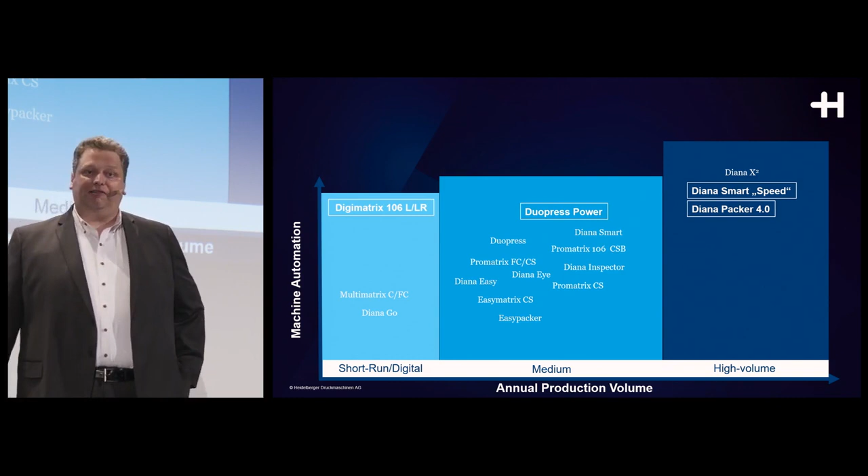We are improving overall productivity on the Diana Smart series with a Diana Smart Speed option that allows us to run up to 600 meters a minute, in combination with a packer and robotic loading. Obviously the robotic loading can be used on any kind of Diana system, so you can also use it on a Diana X. You might have noticed that I jumped one process step, and that is die cutting.

On die cutting, we also have product introductions to announce. We are bringing to market the Power Matrix 106 CSB, as well as the Pro Matrix 145, our first Format 6 die cutter, a 57-inch blanker. Above all this, though, is our layer of data ready, or Postpress data ready. That is a common interface that my colleague Stefan already described to you, and it hasn't changed. It's still a common interface that we defined that is open to any other MIS system for analysis.

Let's get started and take a look at new product introductions here. We're starting off with the Digimatrix LR, our digital die cutter. We are using multiple laser heads to cut a sheet according to the digital information we are receiving, so there are no tooling costs for the die on this machine.

We are integrated in our Prinect workflow so that we can easily convert data and adjust our cutting process. The cutting time itself and the machine speed will greatly depend on how much cutting there is to do. If you have a lot of cut lines, it slows the machine down. If it's very simple, straightforward cut lines, the machine will produce faster.

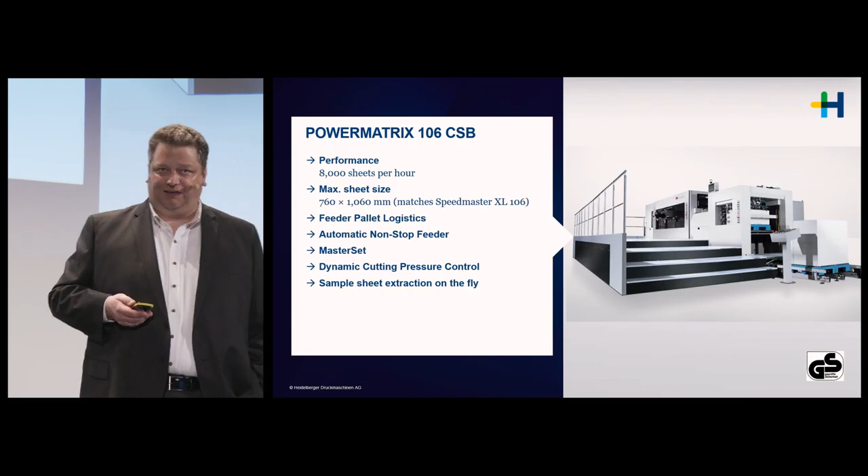As we go down the list of highlights, we're coming to Masterset. Masterset is our optical in-feed registration system. We are reading either 3 print marks, or we are actually reading the actual printed image if it is suitable to be read, and then positioning each sheet individually based on the sensor readings.

We have dynamic cutting pressure control as well. This basically takes care of the fact that if there is no sheet in the cutting station and the tool still comes down, the cutting pressure is automatically reduced by 20 to 30 tons. It's operator adjustable. What's the effect? If there's no sheet, we have no contact between the tool and the cutting plate, thereby enlarging your tool life.

There are no sheets in the cutting station, for instance, when you have a tie sheet insertion or a pallet change in the delivery. Let's move on to our Format 6 size die cutter, the ProMatrix 145.

ProMatrix 145 is in the same performance segment, so you'll find the same features: auto non-stop feeder, pallet logistics systems, Masterset, dynamic cutting pressure control, and on both machines, a sample sheet table. So both the PowerMatrix and the ProMatrix 145 have a sample sheet table.

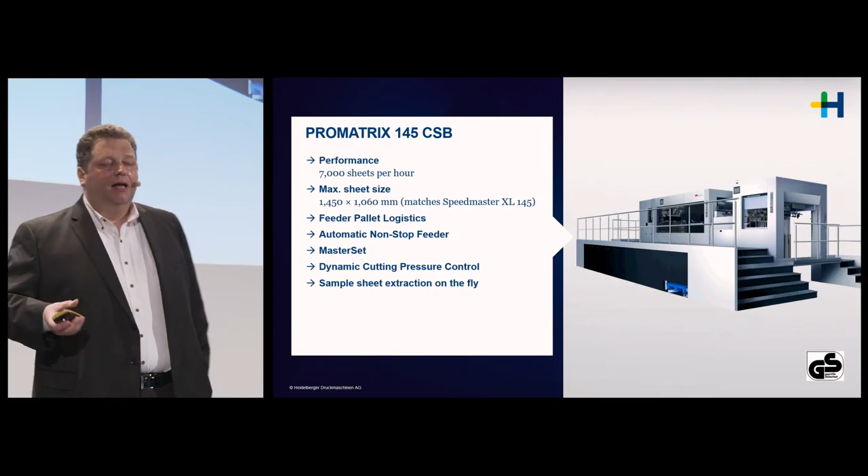What does it do? Typically, if in a blanking operation you want to check for quality, you have to stop the machine, open the window at the stripping station, hope that you stopped at the right space in the right place, then release the sheet, pull it out, close the window, check the sheet, restart the machine—and that's your process.

It stops production, and it's very laborious. In both of our machines that I just described, we can just push a button during production.

The machine will slow down to around 4,000 sheets an hour, and a sample sheet is pulled through the machine. It is die cut and stripped, but passes through the blanking station without any activity, then is presented to the operator on the special sheet extraction table so the quality can be checked without stopping production. The advantage is that we maintain the dynamic component of the punching, stripping, and blanking processes, providing a better image of the actual quality being produced.

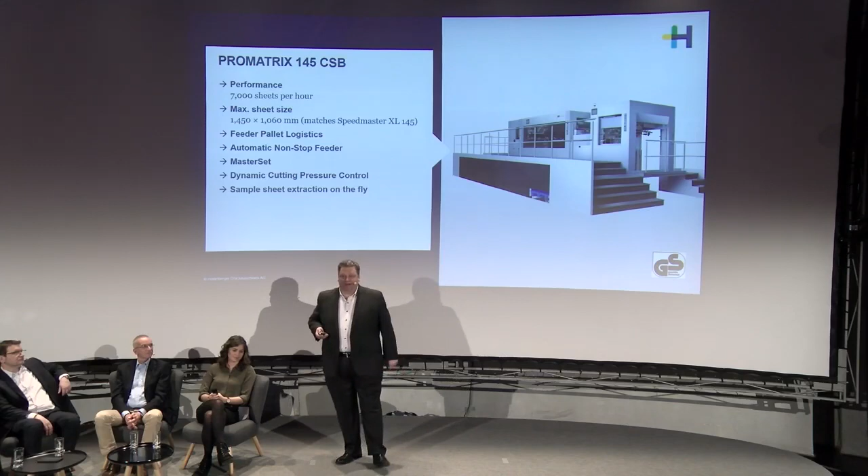On our DuoPress power, we also have several upgrades. But first, what's a DuoPress? It's not a printing press, as we have DuoPresses on our sheet-fed side as well.

In our case, it is basically a machine that has two cutting stations relating to the DuoPress, for the simple reason that you can foil or emboss in the first station, and then go on to the normal cutting, creasing, stripping, and blanking procedure.

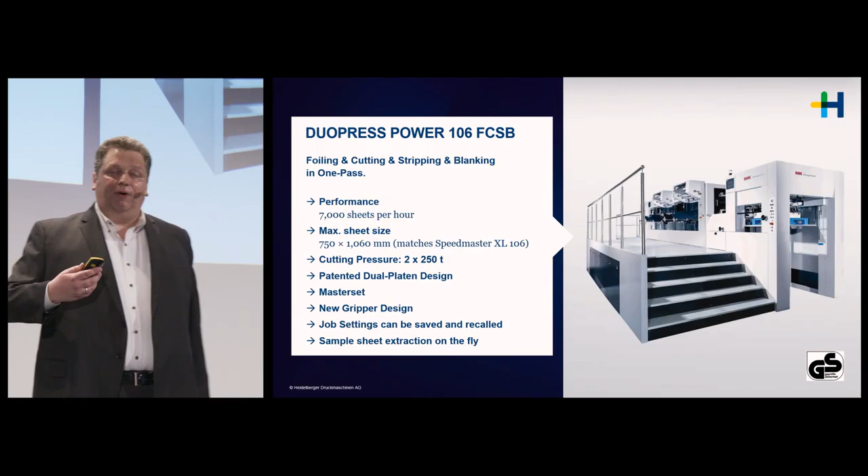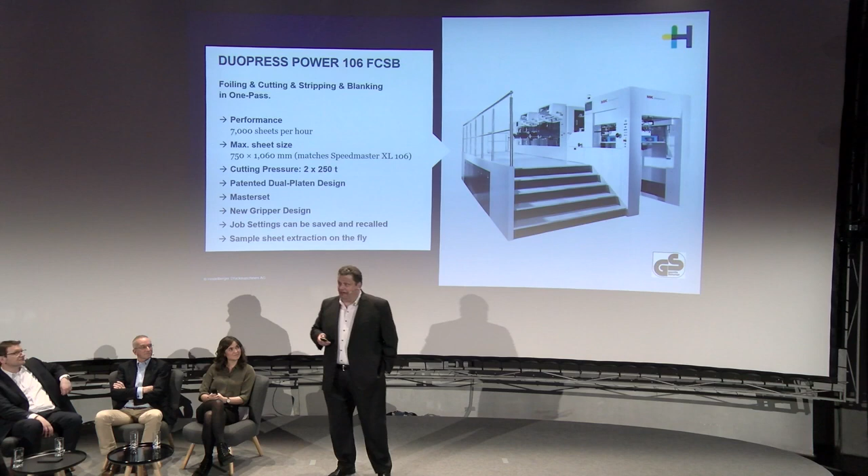On this machine, we have new technology updates in the gripper bar technology and the control, which together allow us to bring the speed up to 7,000 sheets an hour. Compared to regular operations of a hot foiling machine, typically running at 3,500 to 5,000 an hour, that's a major increase in productivity because it's one-pass productivity. You don't have to put the sheet through a die cutter again once it's been hot foiled.

It's a very nice machine. If you're in that high luxury segment of hot foiling, it's one-pass productivity to a blanked product. Once the product is blanked, we want to make sure you can finish it, and that's happening with our Diana folding carton gluers. Here we are focusing on two elements. One is speed, as you can see. Hold that thought for a moment.

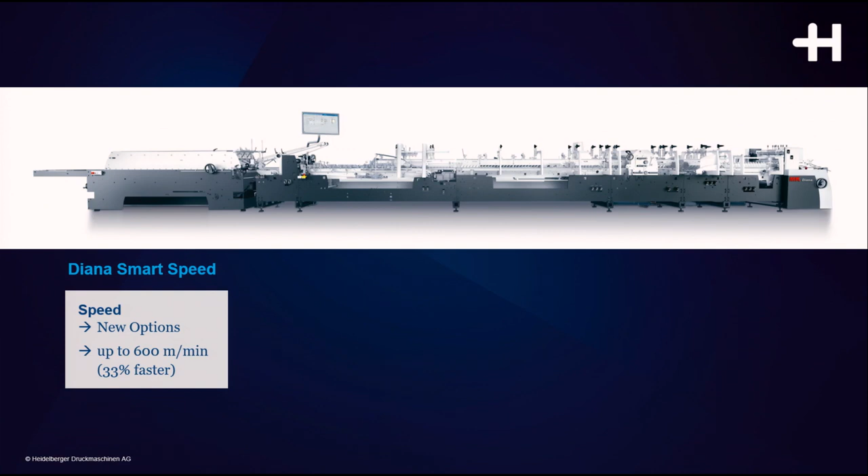We are increasing the speed of our Diana Smart by 33% as an option, up to 600 meters a minute. Hold that thought about speed and productivity—we'll come back to that on the last slide.

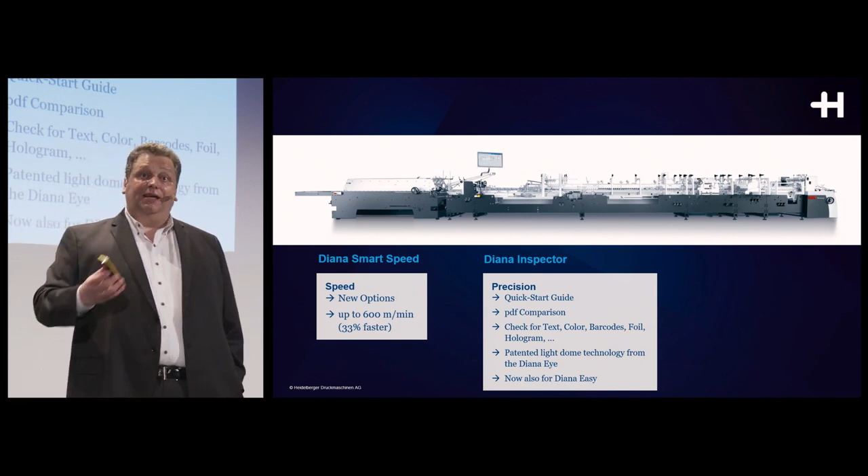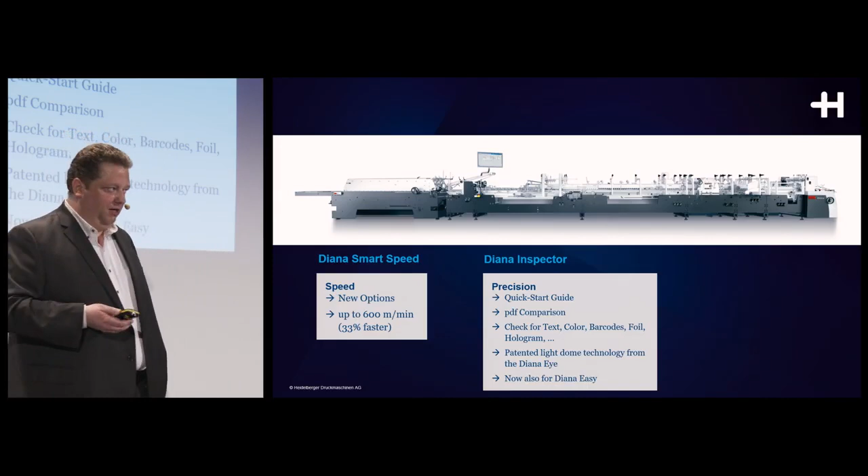Before we get to the last slide, I'd like to talk about inline integration with our Diana Inspector. For many years now, we have a very nice offline high-end inspection machine called the Diana Eye. It uses a patented light dome technology to analyze blanks on metallized board, not just for color and print quality, but also hot foil, cold foil, spot gloss, braille, crease lines, you name it. You can print it, we can inspect it.

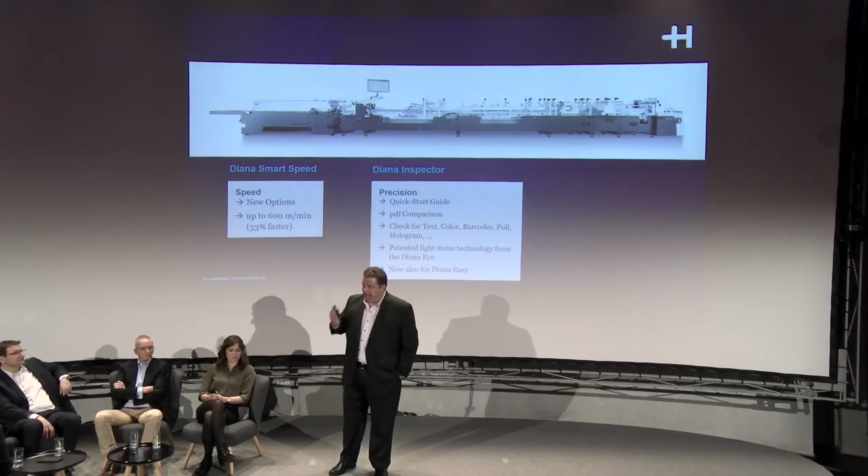You can print on any kind of board, and we can inspect it on a wide range of board as well. This Inspector is now based on the Diana Eye technology and comes with PDF comparison. Rather than going through a complete manual make-ready process, you can use the PDF as a master and start your inspection based on that information. This Diana Inspector is available not only on the Diana Smart, but also on the Diana Easy.

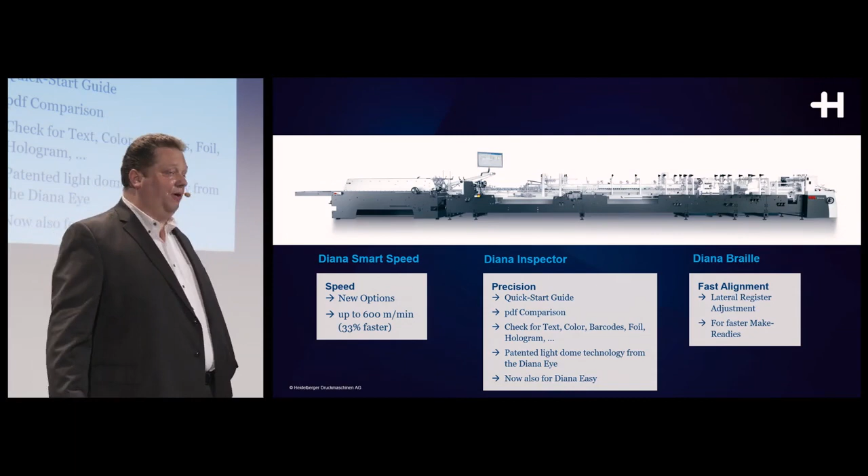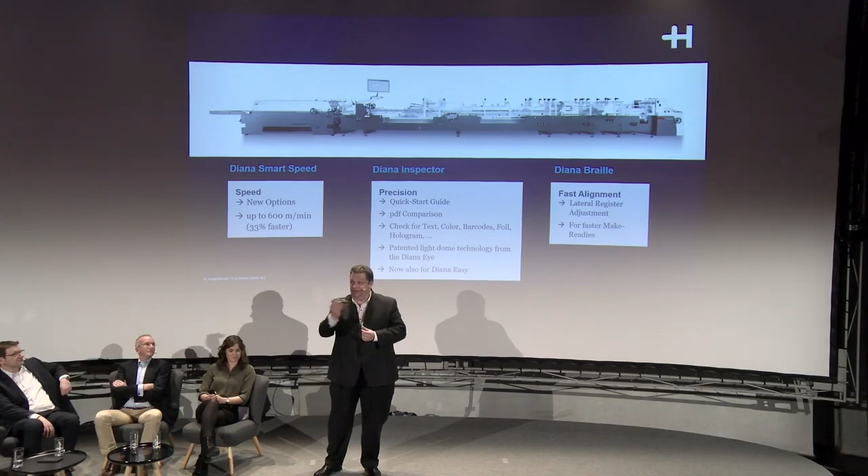One quick word about the Braille unit, which is becoming more important in certain markets around the world. We are decreasing make-ready times by providing the operator with full register control. As he or she lines up the two tools, the upper and lower tool, we can move the lower tool around and across the cylinder for a faster make-ready.

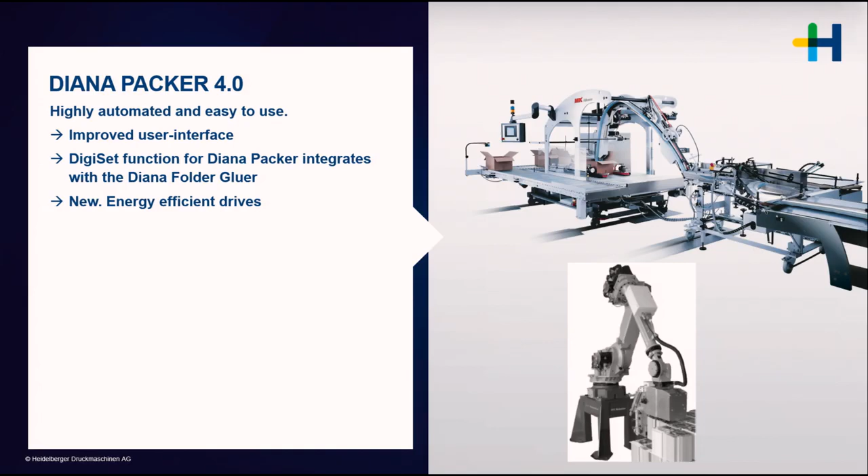Now let's focus on our productivity topic again. The Diana Packer 4.0 is also new at drupa and will be in all locations where we are exhibiting. At that point we are integrated into the folder gluer, so the complete information about the box geometry only needs to be entered once—not at the Diana Packer, but at the folder gluer. The information is then transferred from the Diana folder gluer to the packer, cutting down make-ready times and making the machine ever more productive.

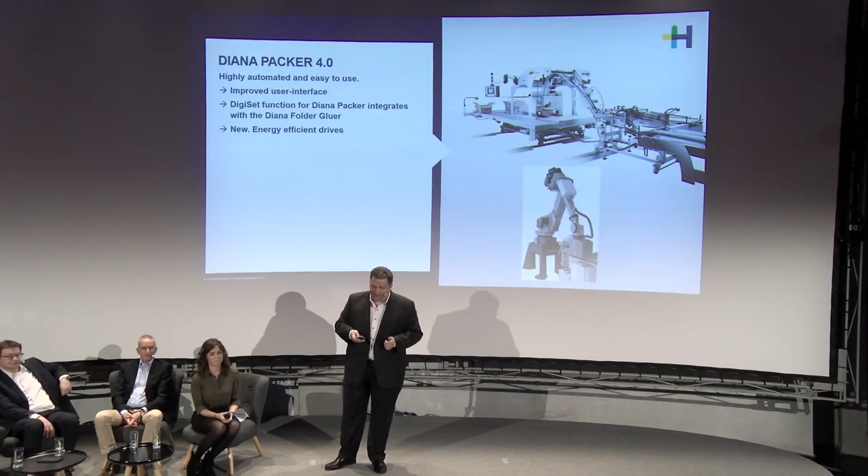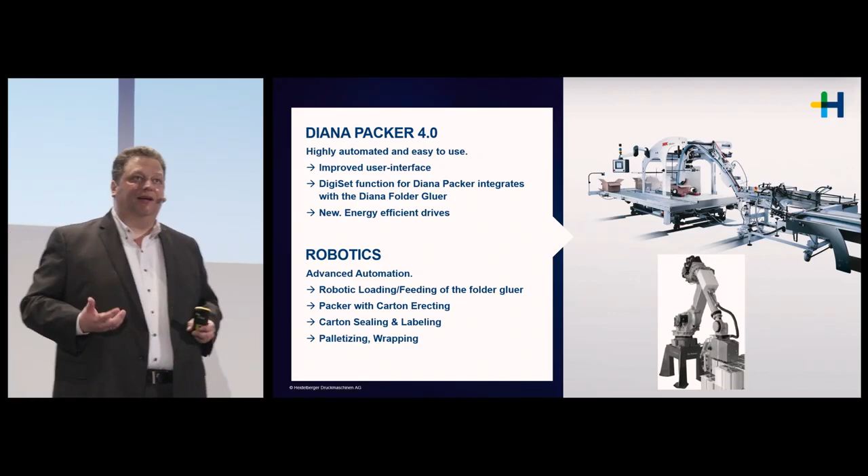If you're looking at running at 600 meters a minute with up to 200,000 cartons an hour, you need support for your operators. No operator is hand packing that anymore, nor feeding that. So at drupa, we're going to show for the first time a robot that is actually feeding a Diana Smart.

We also have capabilities to expand beyond our Packer 4.0 with a carton erector that automatically erects the outer cartons, and additional components that close these cartons, label them, palletize them via another robot, and eventually shrink wrap and palletize them for your customers to be delivered.